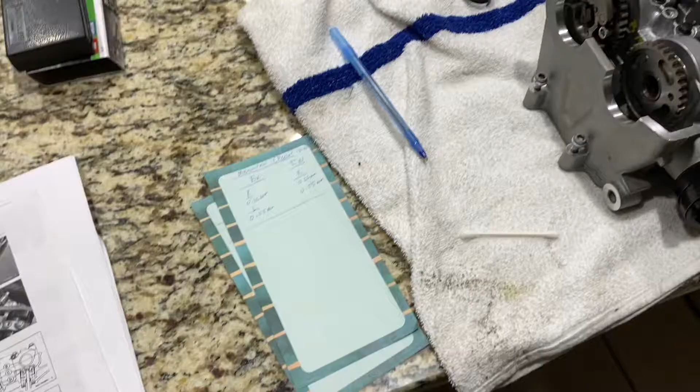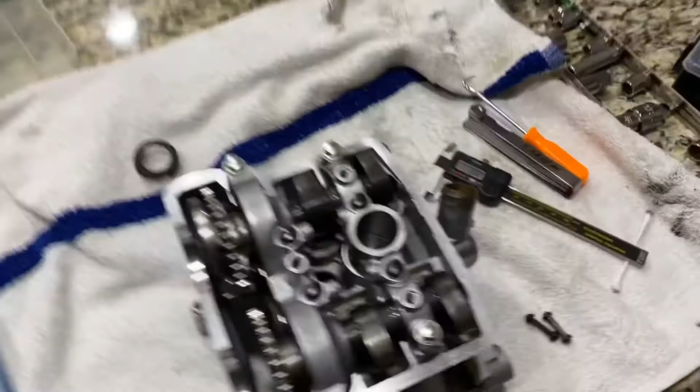Okay guys, so here we go for doing the valve clearances on this head. You'll need a couple things. First, you'll need some of these calipers. They just measure your shim thickness, which that's what these are. These are all shims, Hot Cams. Then you'll need your ratchet and a torque wrench to torque these to the proper specs.

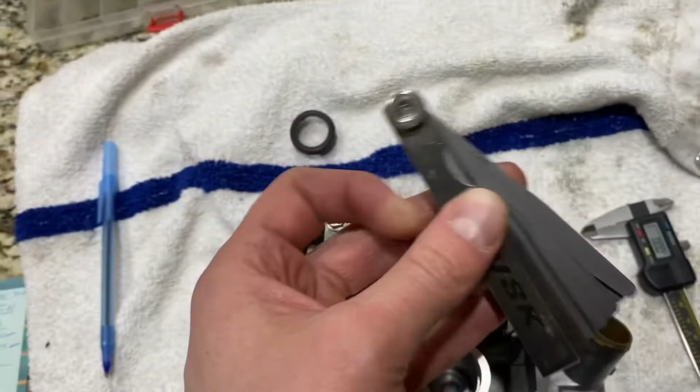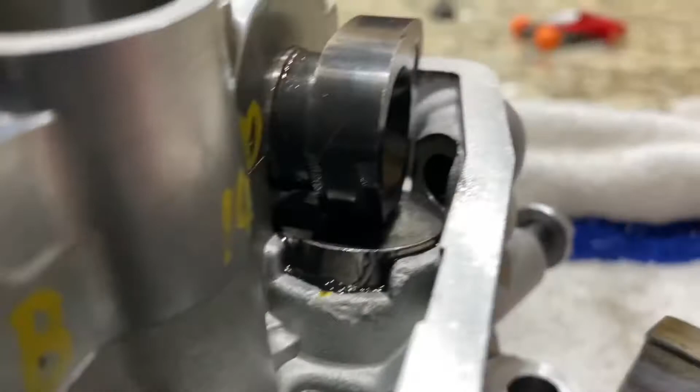So I'm just going to show you. Oh, and you also need these feeler gauges. So just flip that out and you see that they got the different, those numbers there tell you how thick those little gauges are. And what you're trying to do is measure a gap under those journals. See that little gap under there? Was it focusing? But yeah, you're measuring that. And that gap has to be within certain tolerances.

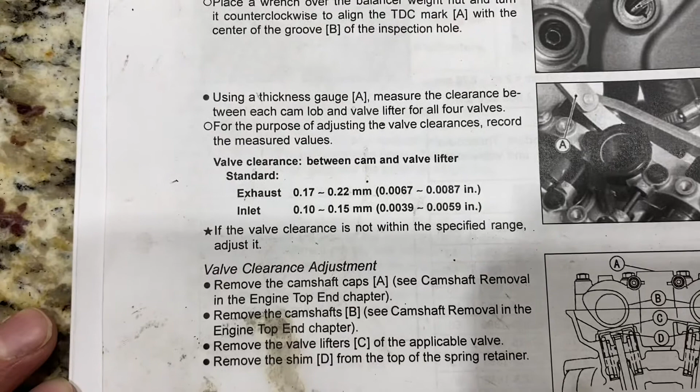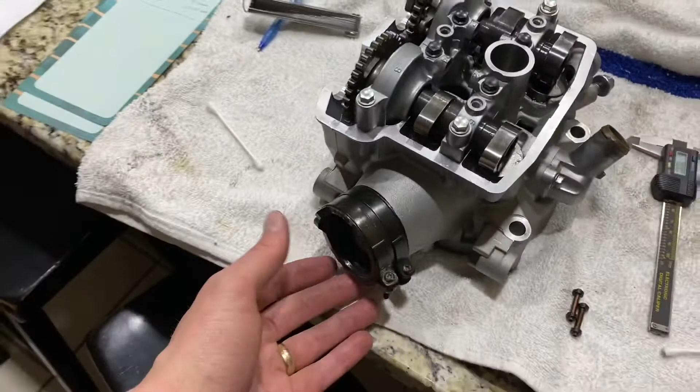And this is the manual. These are the tolerances. So you got your exhaust and your inlet, your inlet and outlet tolerances. And then for those of you who don't know, this is the inlet. This is where your air box is connected. So it sucks in air, goes boom, and then it shoots it out there. So that's exhaust. That's what they're referencing there. So these ones need to be to a certain spec, and then these ones need to be a certain spec.

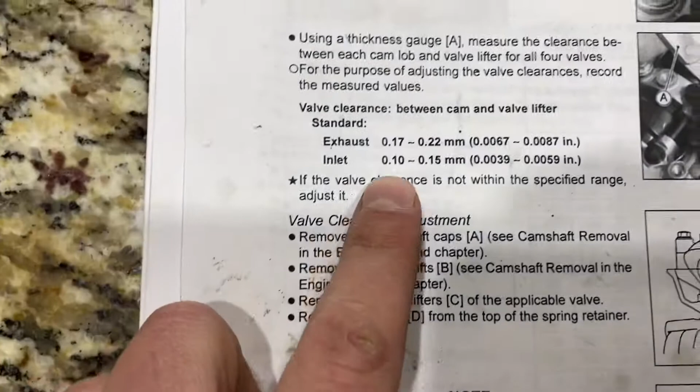So I've gone ahead and done a couple of these, but I figure I'll do one real quick for you. So we'll do the inlet. So typically what you want to do is go over here and start at the higher value or lower value and then work your way in. I've already gone in and done these. So these are the values I measured. I'll just show you how you do that.

So let's do the exhaust left. What's cool about this model, the KX, is you've got it labeled the left side for you. That's kind of cool, huh? So we'll do, we said exhaust left. I measured it to be 0.35 millimeters. So we'll go to here and find the 35 millimeter.

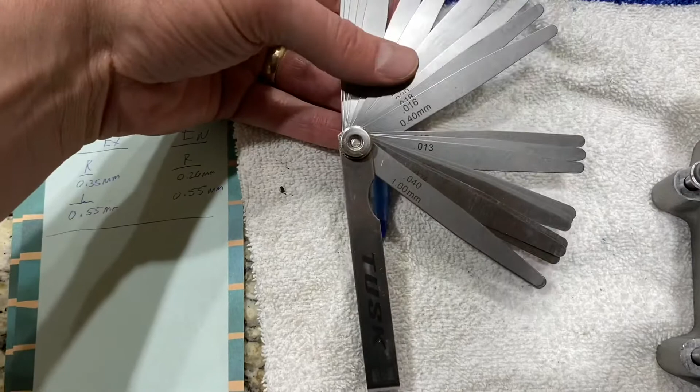I'm going the wrong way. Well, here's 40. So 40 should not fit. Let's just try that. And this exhaust here, and this was the right side, so that's this side here. So you're just gonna try, yeah, see how it's not wanting to go. So then we'll go to the next one, which is 35.

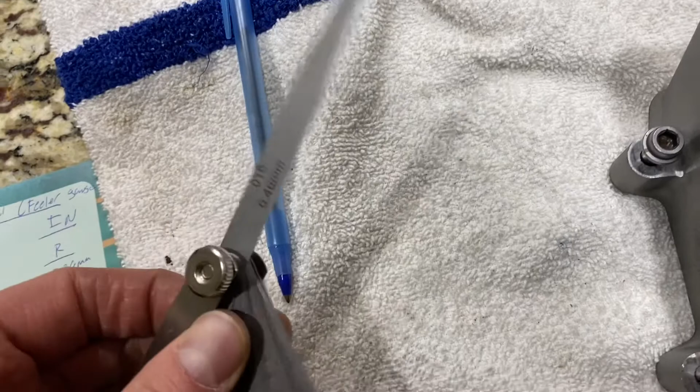I should have got my tripod out.

There's 38. There's 35. So here's 35. 35. Onto exhaust. Oh, like this. Oh, no, I said the right side. Yes, yeah, so it's this one. And let's see. There it goes. Slides under there. And then any thicker than that, it's not going to go. So that's how you measure those distances down there.

You write those down, and then what you'll do, and I'll show you, you're gonna unscrew these. Maybe I'll do it real quick. Yeah, let me get a tripod. I'll get the tripod out. I'll unscrew these and then show you how you take these out, and then we'll go through it.

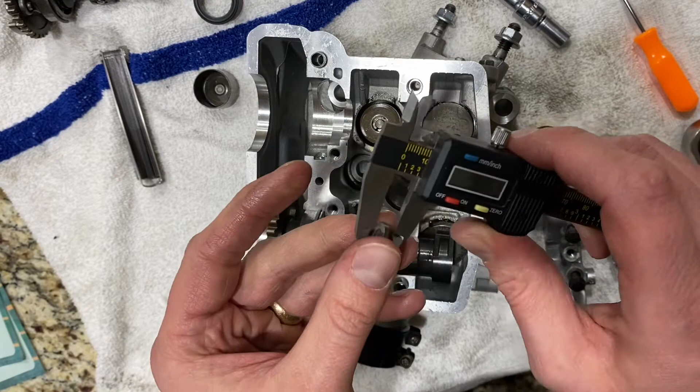Okay. So take this here, turn it on, zero it out. The shim that's currently in here is 2.23 millimeters. 2.31. So

right and left. This was the left side. 2.22 millimeters. Let's measure again. 2.19. These aren't the best calipers. Measure again, 2.19. Okay, so I'm gonna say 2.19.

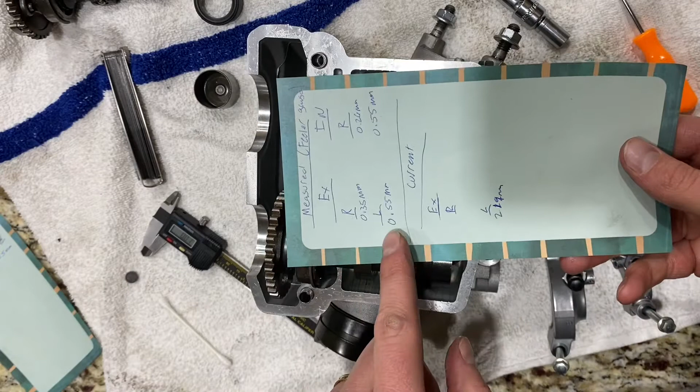So I'm just over here writing it down. So here's my piece of paper. So these were the feeler gauges, and these are the current shims. And then since we did the left side, 2.19 millimeters. So what you do with that information, you plug it into this equation they have in the manual. So you've got that equation.

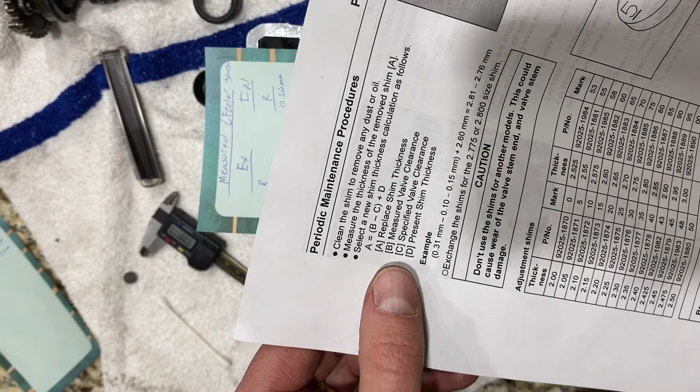So B is your measured valve clearance with the feeler gauges. C is the specified valve clearance. And then D is the present shim thickness that's in there. So ours would look like this to calculate for that one. I'll write down the second one.

So our measured was 0.55 millimeters, minus our specified valve clearance. This is for exhaust. Minus 0.18 millimeters. And then we go plus present thickness, 2.19 millimeters. Okay, so this is what it looked like for our left side of the exhaust.

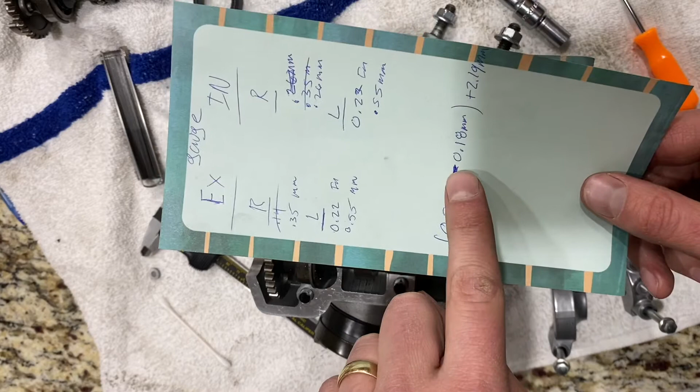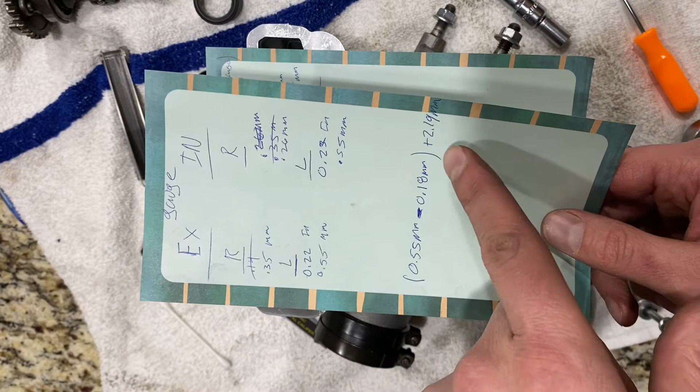We would do 0.55, since that's our measured feeler gauge, minus, this is what it needs to be at, the tolerance that the manual gives. And then you're gonna do that first, because they're in the brackets. And then you're gonna add 2.19 because that's the thickness of the current shim, this one back here that we had in there, and that'll give you the new shim thickness we gotta pull from here. So let's do that real quick.

Okay, so we need a valve shim of 2.56 millimeters. So let's see what we got in here. Oh, shoot. We don't have one that thick. Let's try this one.

Okay. Hey guys, so day 2 on the KX450 shimming process.

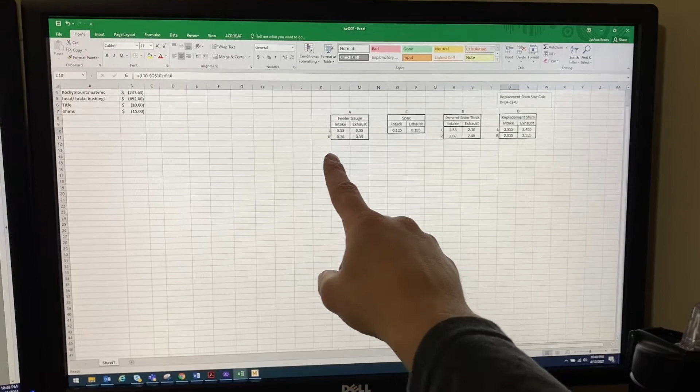Okay. All right. So anyways, on the computer, I used the thicknesses that I got from the actual shim heads, but this is that equation that's in the owner's manual. So this is your feeler gauge thickness. That's your spec tolerance. I just did an average. So if you're a little up or a little low, you got some cush. Then that's the thicknesses of the current shim that I just took off the numbers that were written on the shims themselves. And then it spits out what you should put into it.

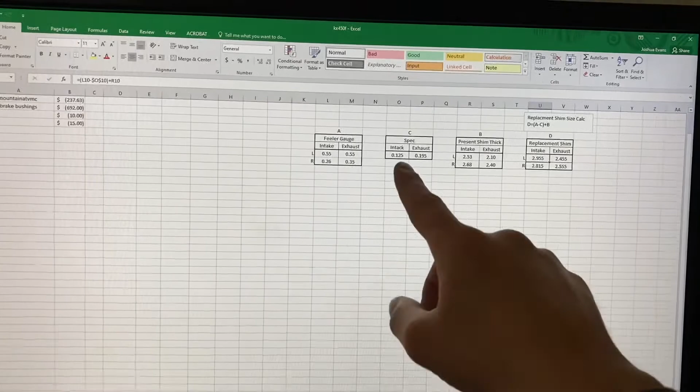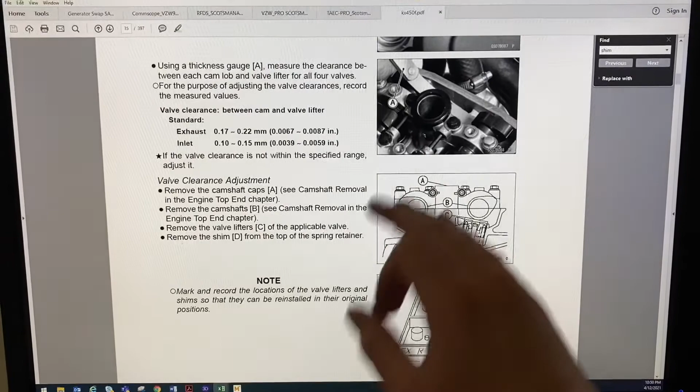So these I ordered from Rocky Mountain. That's the equation if you want to know. And then the letters are above them. And the equation, if you scan over here on the owner's manual, is also in here as well. But those are the tolerances, and I think if I scroll down here, we can get that equation. Yeah, there's the equation right there. So it's also in the owner's manual. I just made an Excel sheet.

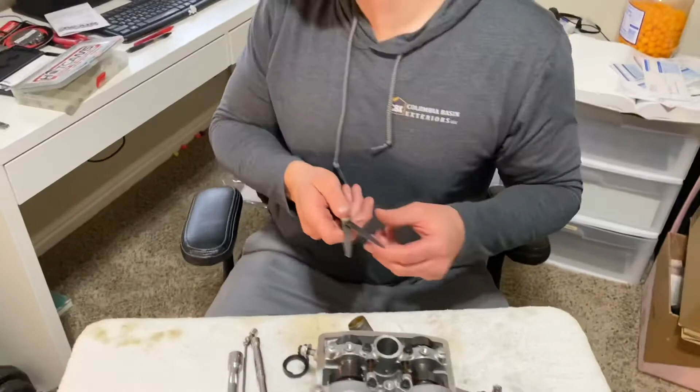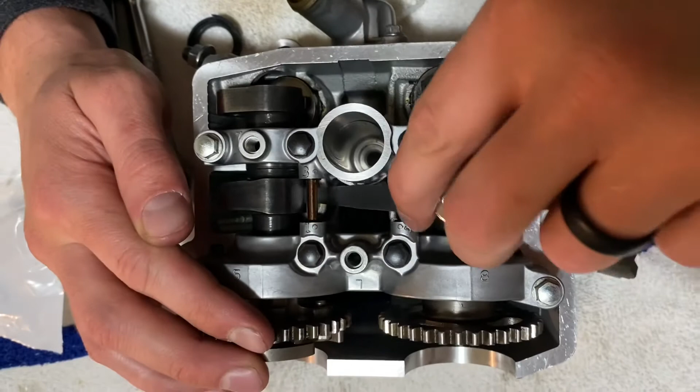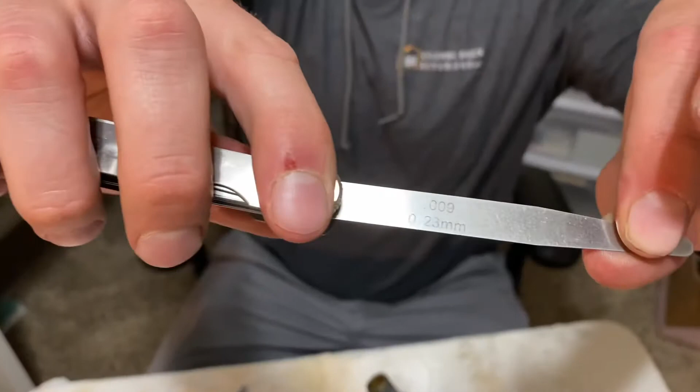Okay. And then for the upper limit, 0.23. So it's 0.22, so this shouldn't fit. If this fits, then you've got to get a thicker shim in there. And it's not going. See how it's stopping? And on this side, it's stopping as well.

So on this model, I like KX because it shows you the tightening patterns. If you look right here, there's 1, 2, 3, 4, 5. But it also shows you your right side and left side. There's an R written for right side of the bike. So if you're putting this together and you're wondering what side's the right, this would be the right, and then your exhaust is here and your intake's here. So we're good to go. I'm gonna go ahead and get this thing all put back together and on the bike, and we'll do a startup.